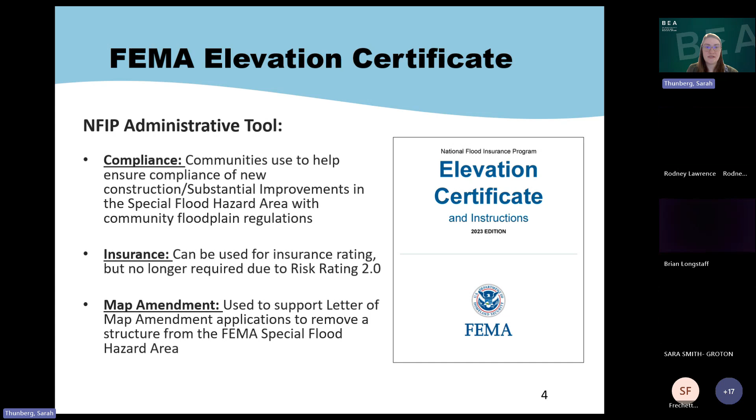The elevation certificate can also be used to support a letter of map amendment. It is essentially the final legal document that certifies how high the lowest floor of a structure is, and can then be used to get that structure removed from the special flood hazard area.

So the current version of the elevation certificate - whoops, this is incorrect, I meant to say it was released, not last month, it was released on July 7th of 2023. This update was to make sure that it aligns with the Risk Rating 2.0 new insurance rating methodology. It also has expanded sections to include more detail, and there's now a requirement for at least 2, but preferably 4, photographs accompanying the elevation certificate.

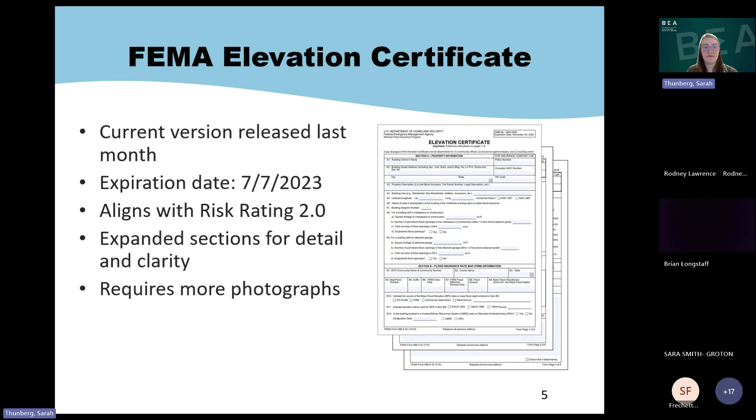If your community is part of the Community Rating System, or CRS program, that is a program that offers discounted insurance rates for community members in communities which have elected to have higher than the minimum NFIP standards. One of those activities that you can get credit for in the Community Rating System is requiring elevation certificates for all finished construction after either new construction or substantial improvements have been made within the special flood hazard area.

Communities are required to review all elevation certificates for legibility, completeness, errors, and to verify compliance with the community's floodplain regulations.

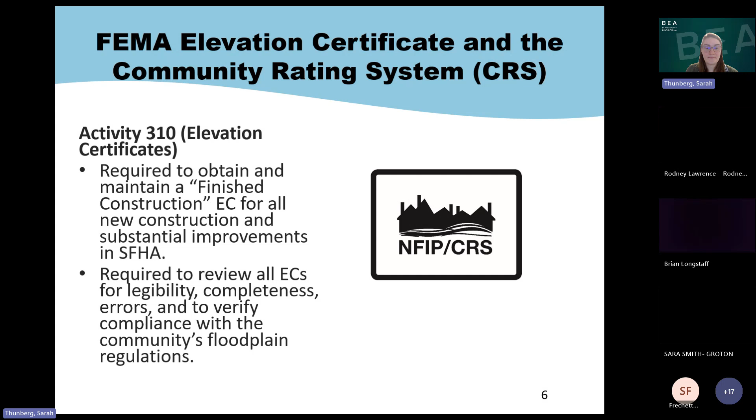As part of the annual recertification process with the Community Rating System, communities are required to submit all elevation certificates that have been approved within the last year. The CRS team will then review the elevation certificates and provide feedback in an elevation certificate evaluation report. This report will indicate any errors or compliance issues which are recommended to be addressed.

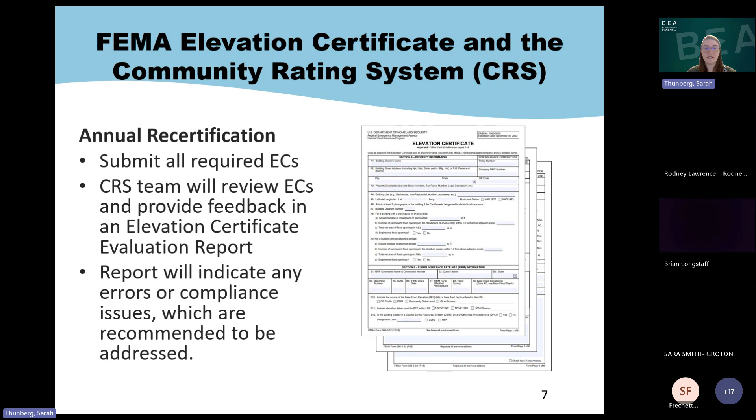So the cycle verification for the Community Rating System: you go through and submit all required elevation certificates, then the CRS team will review them and provide you with that elevation certificate report. In order to be fully verified with the CRS program, at least 90% of the community's elevation certificates must be correct, essentially having no problems. If not, the community must correct those elevation certificates in order to stay in the CRS program, and your community's CRS credit score depends on the elevation certificate correctness.

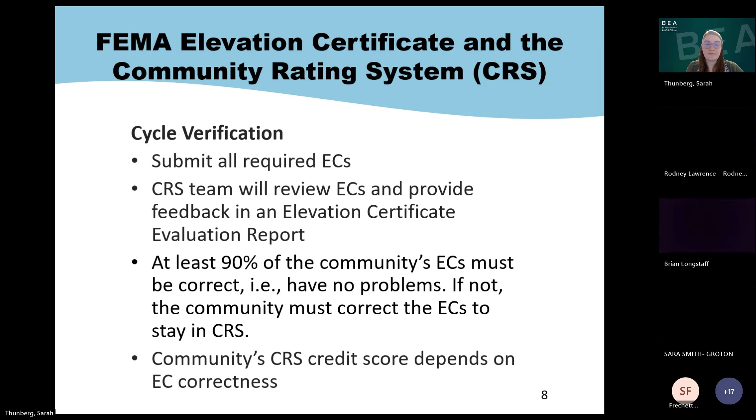So just a quick learning check here. Feel free to put your answers in the chat. True or false: does an elevation certificate certify whether or not a building is compliant with the community floodplain regulations and/or minimum NFIP standards? I'll give you guys a moment to put whether you think that's true or false in the chat.

I'm getting some answers in the chat here. Looks like true is the most common, or what everyone's agreeing on.

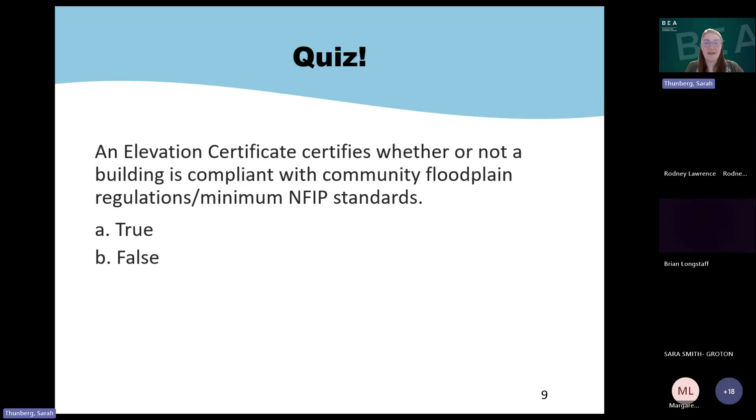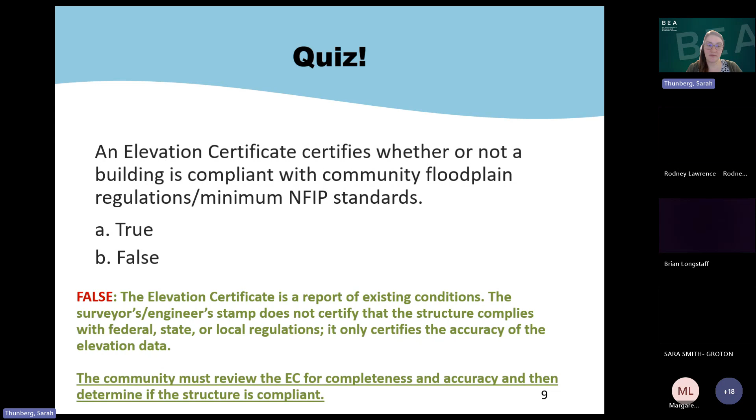That is actually false. The elevation certificate is a report of existing conditions. It's essentially the surveyor's or engineer's stamp, which does not certify that it complies with federal, state, or local regulations. It only certifies the accuracy of the elevation data. It's up to the community to review the elevation certificate for completion and accuracy, and then determine if that structure is compliant.

So when reviewing an elevation certificate for compliance with the community's floodplain regulation, even with the professional engineer's seal, it is possible to make mistakes.

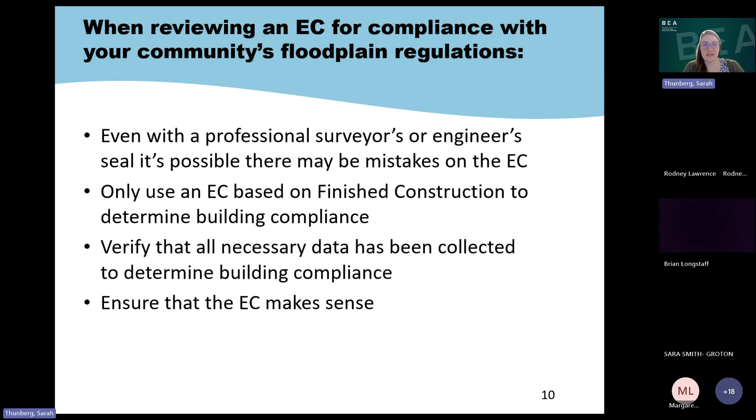You only use an elevation certificate based off of finished construction. You don't want to be verifying compliance on a pre-construction elevation certificate. Communities also want to verify that all necessary data has been collected to determine compliance, and ensure the elevation certificate makes sense - like not saying the lowest floor is actually higher than the roof, just using common sense that the right floors are marked at the right elevations.

So we're going to now go through the elevation certificate section by section. Here I have the sections listed out. There are also two new sections within the elevation certificate - section H and I, which have been added in the latest issuance. But we're going to start off with section A, property information.

This is the latest version of the elevation certificate. Section A is completed for property in all flood zones - that's both A and V, inland and coastal.

This is generally detailing your property information: building owner's name, street address, city, state, zip code, property description. Essentially you want to fill out your lot numbers, tax parcel numbers. Then item A6 is where you indicate the requirement for at least two, but when possible four, clear photographs, one for each side of the building. Additionally, this is where you're going to indicate which building diagram number you're going to use.

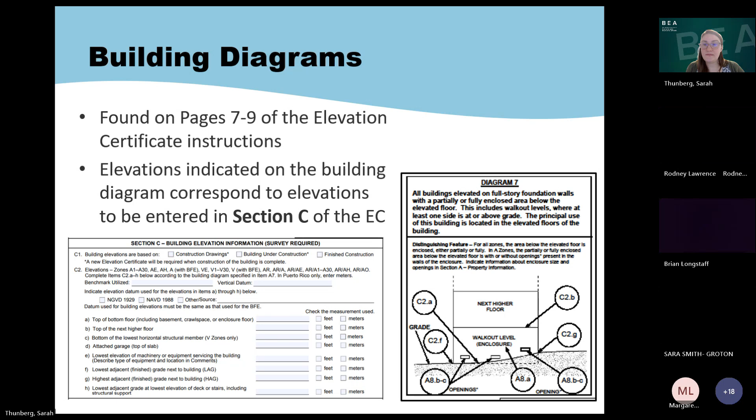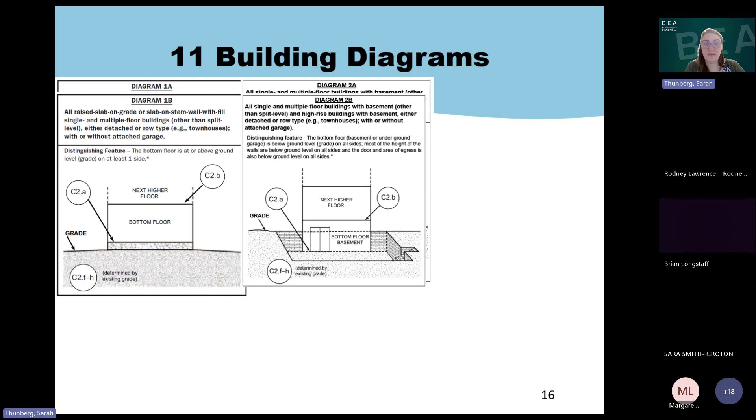I'm just going to go through some of the building diagrams possible to use on the elevation certificate. You have diagram 1A for all slab-on-grade single and multi-floor buildings, other than split level and high rise. Diagram 1B is similar, except there is a slab on stem wall with fill. Then diagram 2A is for all single and multi-floor buildings with basement, other than split level and high-rise buildings with basement, either detached or row type with or without an attached garage. Diagram 2B is again for all single and multi-floor buildings with a basement, other than split level and high-rise buildings with a basement, either detached or row type with or without attached garage.

I'm not going to read through every single one of these, but there is diagram 3, 4, 5, 6, 7, 8, and 9. All of these building diagrams are to include whether or not there is a basement, or if it's a slab on grade or enclosed area below. It's just important to verify that you are using the correct diagram on the elevation certificate.

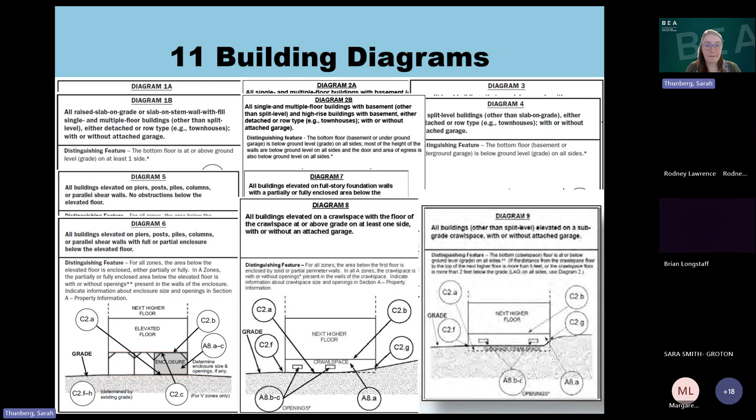So going back to section A, section A8 has been expanded for crawl spaces. This is to gather all of the data, because something you would want to know about a crawl space is whether or not there is one, and whether it's below grade on all four sides. That affects how the structure is considered for both floodplain permitting and flood insurance purposes.

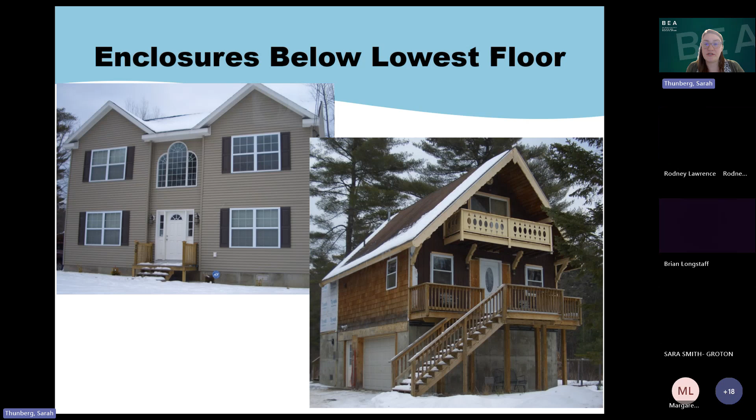Now, there's also elevations below or enclosures below the lowest floor, which can be used for attached garages. Those would be highlighted here in section A9 with the square footage, whether or not there is flood vents and the number of flood openings, and then the total square inch of those flood openings.

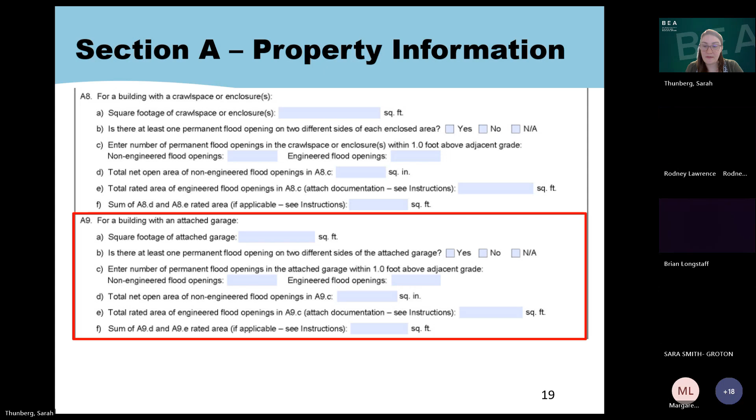So here are some examples of what an attached garage can look like. It can be the same elevation as the house, or it can be partially below grade, but not below grade on all sides. So it's important to make sure when you're filling out those building diagrams that you're capturing the correct type of enclosure.

Going on to section B, this is completed for all properties within all flood zones. This is where you're going to fill out the flood insurance rate map information with the community name, and this has been changed now to require a specific box for the community identification number. If you don't know your community identification number, it can generally be found on either the flood insurance rate map or the flood insurance study. Or if you don't have that information, you can always reach out to me and I can tell you what your community identification number is.

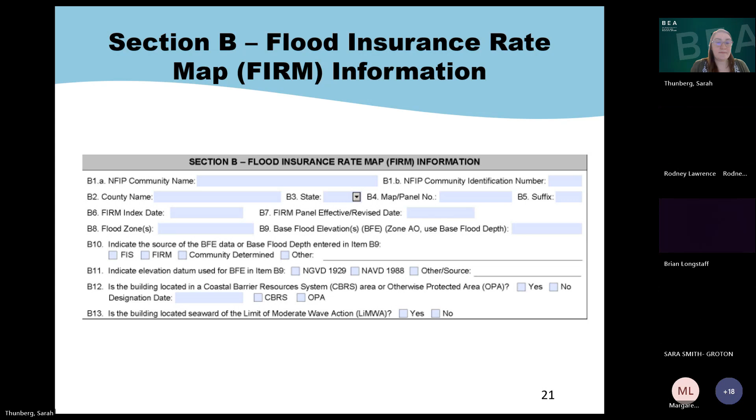So the new changes are that both B1.a and B1.b have been split up into two different boxes now, and item B10, the flood insurance study, has just been changed to only say flood insurance study rather than flood insurance study profile. But otherwise, everything else is still the same in section B.

So when you are filling out section B, here are some examples of where you can get some of the information required. You can get your flood insurance rate map index date, also your community identification number, map panel number, and the FIRM panel effective and/or revised date. Those should all be on the flood insurance study.

In section B, for most AE zones, the base flood elevation should be taken from the flood insurance study and not the map panel. That's because on the maps, the base flood elevation is rounded to the nearest whole foot, but if you are filling out an elevation certificate, you want to make sure that you are using the most accurate data, which would be on the flood insurance study. Those base flood elevations should be to the tenth of a foot, i.e. 140.4 feet versus 140 feet, which you would see on the map.

For AO zones, you just want to use the base flood elevation, the depth number that is on the flood insurance rate map. For V zones, it's pretty similar—you want to use the elevation that's on the map itself. And in zone A, not zone AE, zone A that has no base flood elevation available, you want to write in NA.

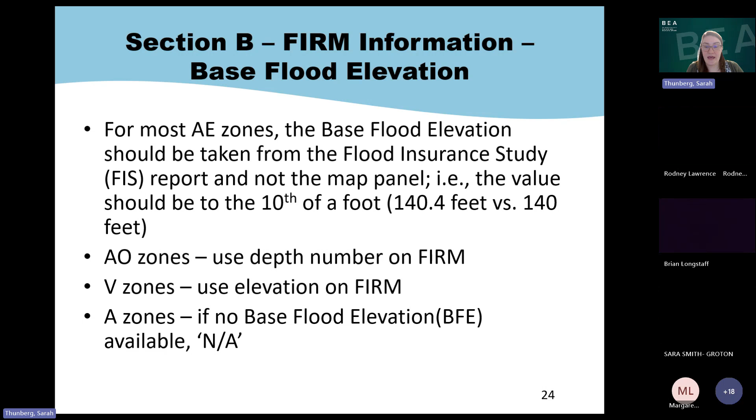Additionally, you want to make sure that you are using the same vertical datum that is on the flood insurance study. And in New Hampshire, we don't have any coastal barrier resource systems or otherwise protected areas, so at the moment item B12 would just be NA. One thing you do want to know with these elevation certificates is even if there is a section that doesn't apply, you still want to write something in every box, as that is something FEMA might flag for completion or completeness.

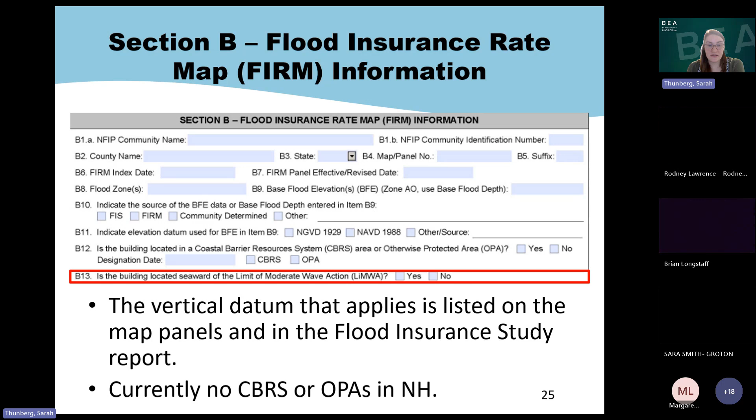Lastly, in section B, this really only applies for coastal zones, and you want to indicate whether or not the building is located seaward of the limit of moderate wave action.

All right, moving on to section C. This is where you're going to fill out the building elevation information. Doing an elevation certificate, it's generally best practice to use the finished construction when you are getting an elevation certificate. Sometimes you might do a pre-construction elevation certificate, but you always want to follow it up with a finished construction certificate.

And then you just want to go through these, marking the vertical datum and which benchmark was used. And then also indicate whether or not there is a conversion factor that you are using to convert one elevation datum to the other. And then it's pretty simple filling out the elevations. This is where you would just take it from the surveying data.

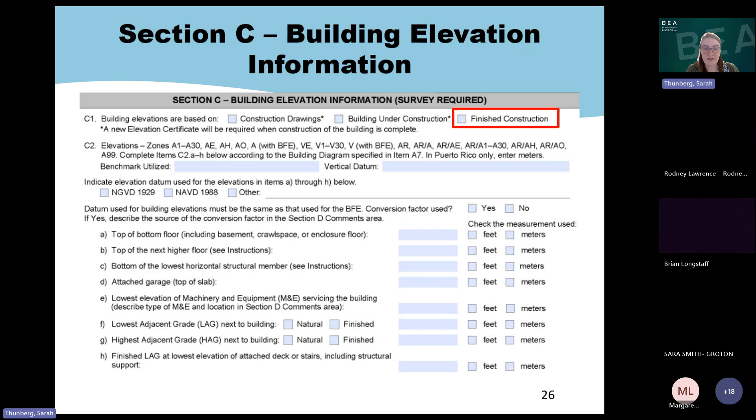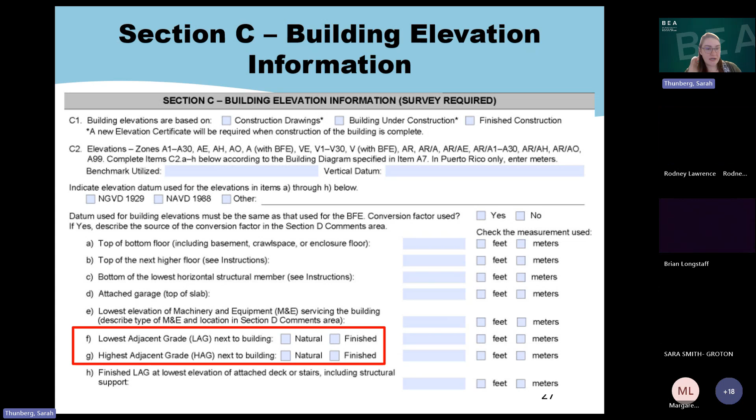All right, I got ahead of myself there. This is just where I was highlighting the lowest adjacent grade and that natural versus finished fill.

So section D is the next section to be completed if the property has a determined base flood elevation. So the elevation certificate for this kind of property must be completed by a surveyor, engineer, or architect who is registered in your state or in New Hampshire.

So you want to look at your paper copies to see that section D starts on the bottom front of the form and continues to the top back. It spans a couple pages. So you just want to make sure that if you are filling it out on a paper copy, you get the whole section filled out.

This is another location where errors can be made, if the person completing the form forgets to turn over the form and then add the signature and seal, because both the signature and seal are required for this section to be complete. And the document must be an original, otherwise FEMA is not going to accept it.

And in the comments section, this is where you're going to want to put what type and location of machinery with the lowest elevation, whether the interior grade was used to determine if openings are within 1 foot of the grade or of the highest adjacent grade. Also unique building characteristics, such as a bulkhead, and then anything else that needs explanation.

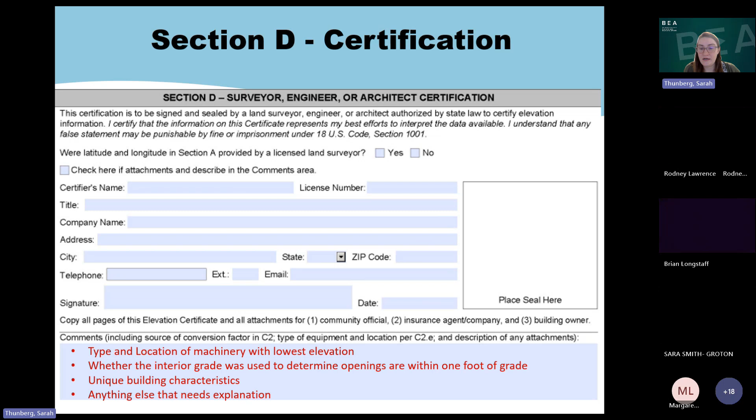This section did not have any updates in the 2023 amendment. So this is still exactly the same.

Now, section E did get a couple updates. Well, I guess let's first start off with this: it can be completed by the homeowner. And this is where you're going to be putting in whether or not there is a crawl space, also providing measurements for the top of the bottom floor and any areas within that have the flood openings or attached garages.

And so in items E2, E4, or E3 and E4 would be reviewed by the local floodplain administrator to check the structure's compliance. This section is also used both for flood insurance purposes as well as floodplain management.

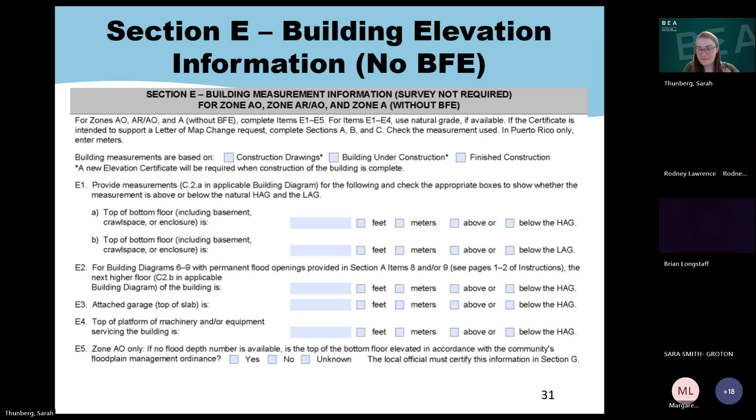All right. Okay, yeah, I believe that is, sorry, I had a couple notes that were supposed to go on a different section.

All right, so moving on to section F. This one is pretty similar to section D. It's the section where the person completing the form needs to sign it. This should be the property owner or the owner's representative. Again, this is where you're going to be putting in those unique building characteristics and any comments for anything that needs to be explained.

All right, so moving on to section G. This does not, it is not required, but it is recommended for community officials to complete. It is the easiest way to keep track of permitting in the community. This section is for floodplain management purposes. It's not for flood insurance.

So essentially, one example is that putting the first floor 2 feet above the base flood elevation cuts the cost of flood insurance in half. But again, this section is not necessarily used for the insurance purposes.

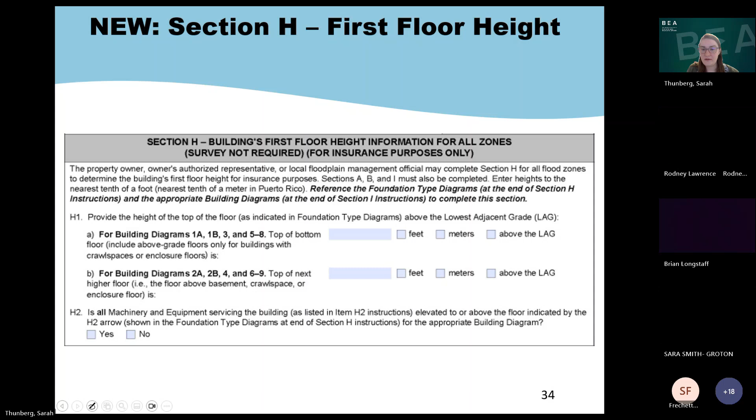All right, so I'm going to move on to section I. So I put the wrong notes in this one as well. This is essentially where the property owner is going to certify that all of the data is as correct as they are aware of, essentially certifying that this is the document they would like to submit as the legal or final legal elevation for your property. And again, this is where you're going to be adding any comments for unique characteristics of the building.

All right, so now I'm going to go over a compliance review example, essentially going through the elevation certificate as if I were a community official, just checking the form for compliance. So for this scenario, the community has permitted new construction of a one-story residential structure with a crawl space and attached garage in zone AE. The community requires elevation of the lowest floor to be at least 1 foot above the base flood elevation. The community conducted inspections during construction, construction was completed, and a finished construction elevation certificate was submitted for review and approval.

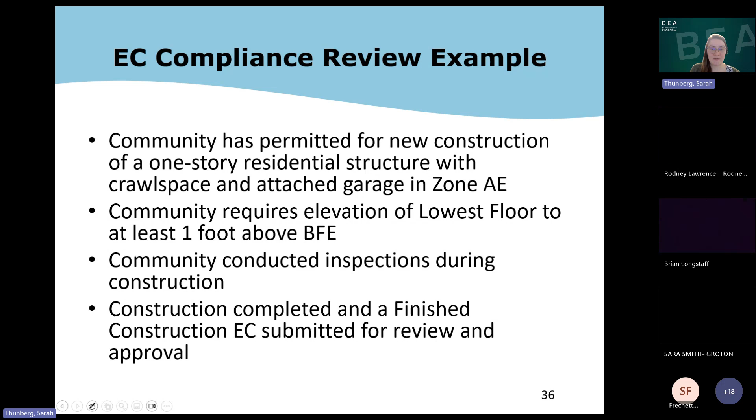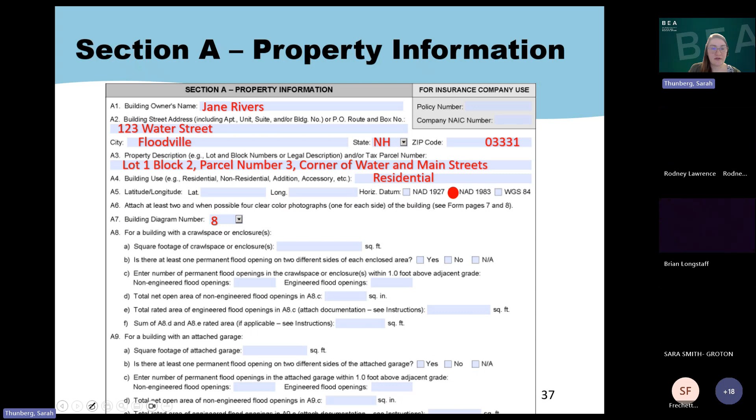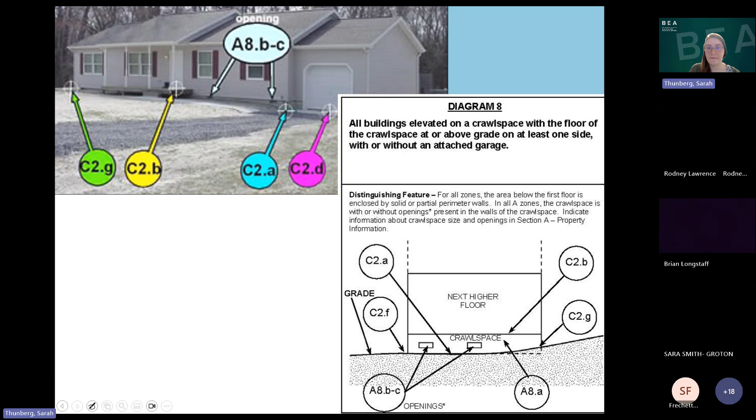So when filling out the property information, you just want to verify that the square footage of the crawl space is here, also the number of flood openings and the total net area of the flood openings. And then for the attached garage, you want to verify the square footage of the garage, whether or not there are flood openings, and also the net area of the flood openings. In this case, there are none, and you would indicate here that there are no flood openings in the garage.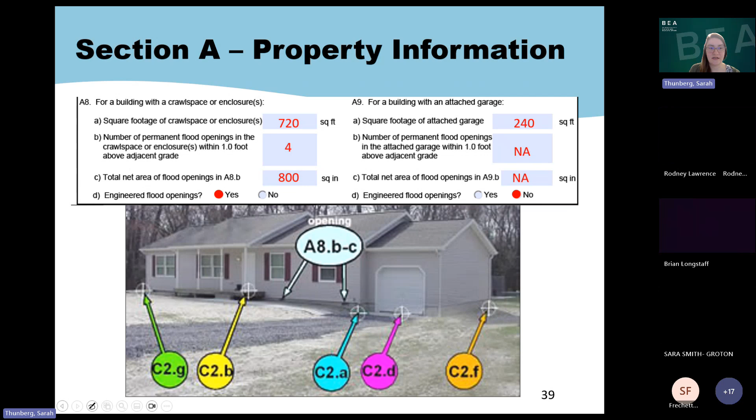This is just the same form, the same section A. This was the previous issuance of the elevation certificate, which has now been updated, but it still has the same information. It's just now kind of stacked on top of each other.

All right, so you also want to ensure that for new construction or substantial improvements, the lowest floor must be elevated to the base flood elevation or higher if the community enforces a higher standard. And enclosures allowed below the base flood elevation must be used solely for parking, building access, or storage. Also, they cannot be below grade on all sides and can contain the required number and net area of flood openings. When all 3 of these enclosure criteria are met, that's what's going to be considered the lowest floor, this first living floor space. This enclosure would then just be an enclosure used for storage and parking, and be fully vented.

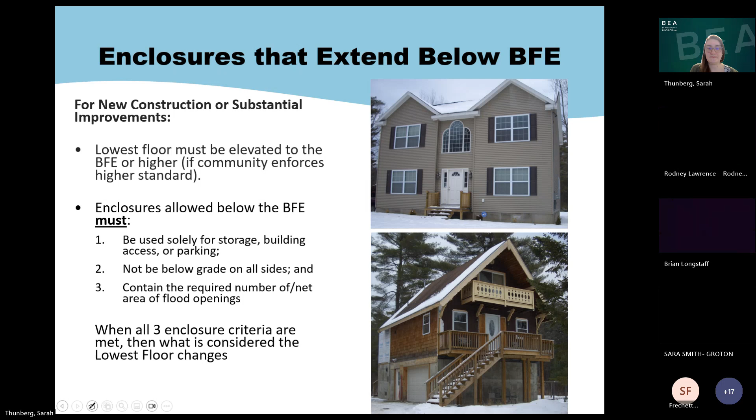So which enclosures require flood openings? That would be solid perimeter foundation walls, so crawl spaces with full height under-floor spaces or other underfloor spaces on which a manufactured home is installed.

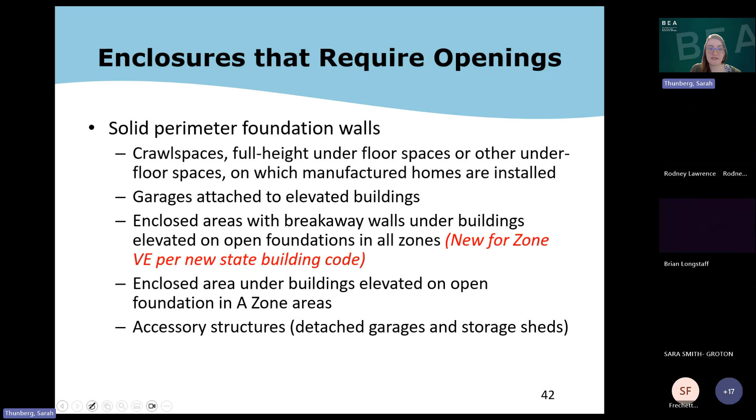This also includes garages attached to elevated buildings, enclosed areas with breakaway walls, under buildings elevated on open foundations in all zones, and also enclosed areas under buildings elevated on open foundations in A-zone areas. Also for accessory structures such as detached garages and storage sheds.

An opening is considered a permanent opening that allows for free passage of water automatically in both directions without human intervention. A window, a door, or a garage door is not considered an opening, and openings may be installed in doors.

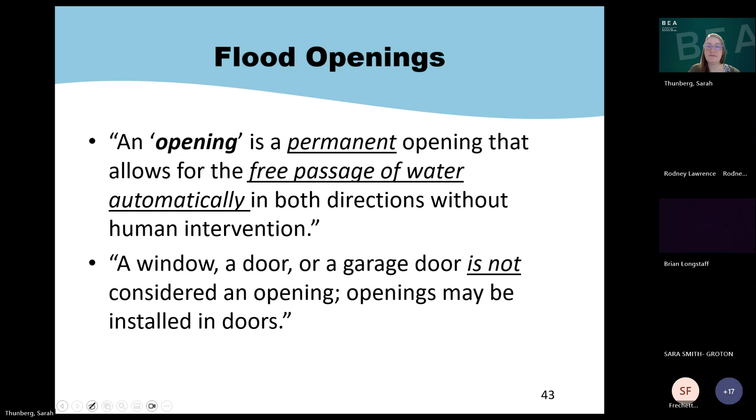Continuing, the openings shall provide a total net area of not less than 1 square inch for every square foot of area enclosed. That excludes any bars, louvers, or other covers of the opening.

Openings shall be on at least 2 sides of the enclosed area. And if a building has more than one enclosed area, each area must have openings to allow floodwater to directly enter.

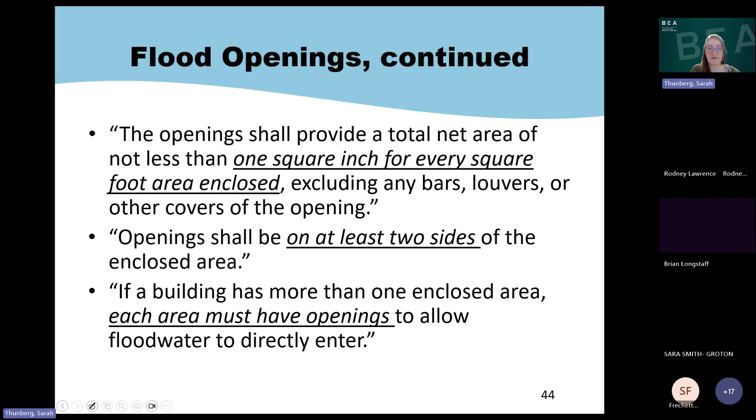The bottom of a flood opening cannot be more than 1 foot above grade, interior or exterior, whichever is higher. So here I have a diagram. This is our flood opening here, this is the exterior grade, this is the foundation with the interior grade here, and this cannot be more than 1 foot.

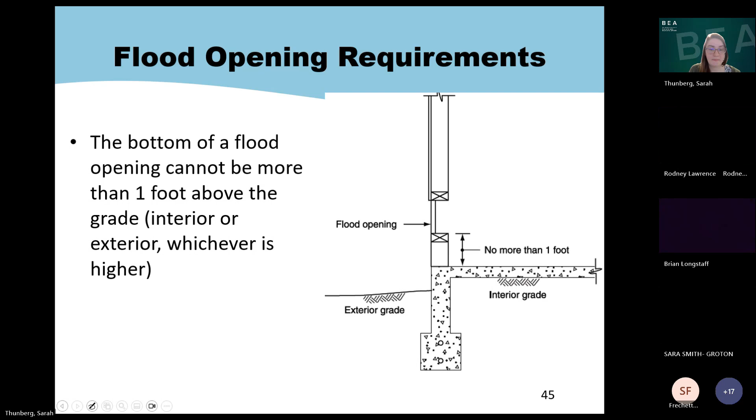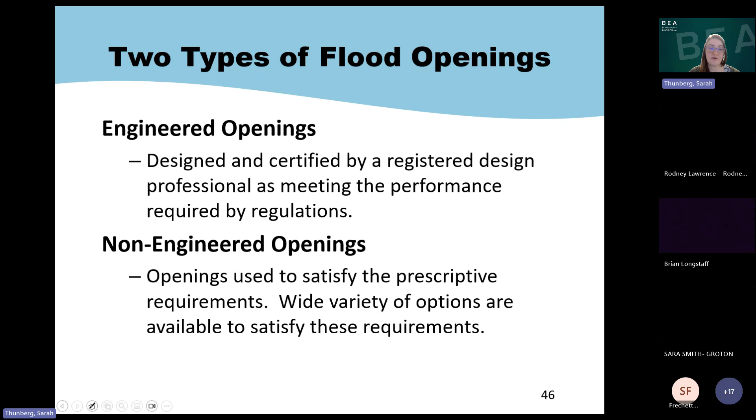So there are 2 types of flood openings: engineered and non-engineered openings. The engineered openings are designed and certified by a registered design professional as meeting the performance required by FEMA regulations. The non-engineered openings are used to satisfy prescriptive requirements. There's a wide variety of options available to satisfy these requirements.

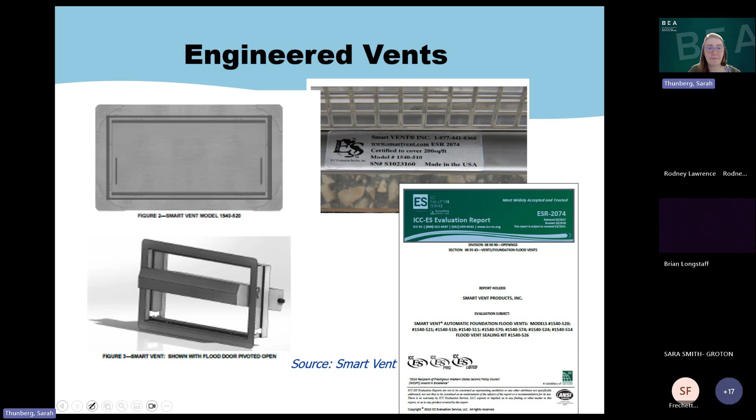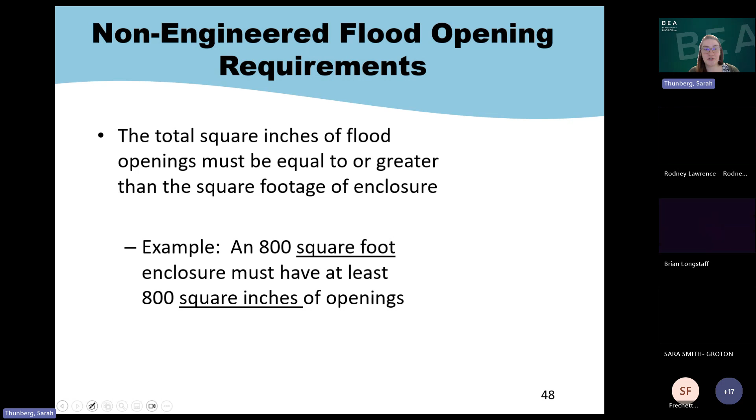Now, non-engineered flood openings have to have the total square inches of flood openings equal to or greater than the square footage of the enclosure. So an 800 square foot enclosure must have at least 800 square inches of openings. This is an example of a non-engineered flood opening, literally just an open vent that will not allow rainwater in, but flood waters are allowed to freely move into that area.

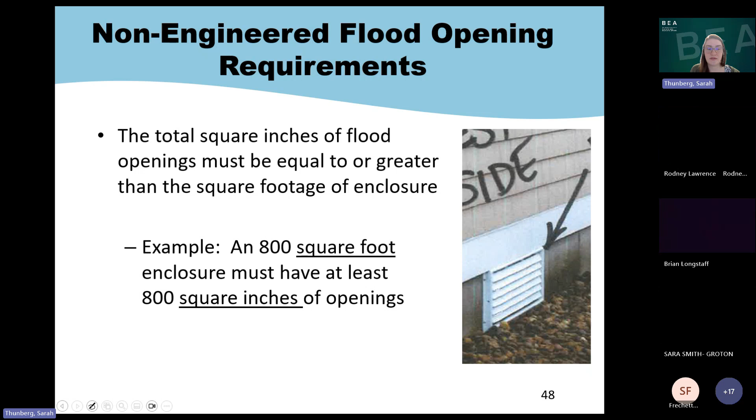So in reviewing the crawl spaces and attached garages for the flood openings, this is the checklist that you want to go through.

Is the net area of flood openings, line A8c here, equal to or greater than the square footage of the crawl space enclosure? If yes, it's good; if not, you need to look further into that. So right here we have 4 flood openings and square footage is 720. We have 800 square inches of flood openings, so we are good with the crawl space.

Does the number of openings within 1 foot of grade appear correct? Yes, it does. If engineered flood openings is checked, is there accompanying documentation about the flood openings? That is something that would be submitted with the elevation certificate.

Skipping this one because we did have at least one flood opening checked here. Then, is there an attached garage? And if so, is the square footage included? Yes it is, that's right here. And then, are there openings, and if so, do they meet the same requirement noted for the above enclosures? No, there are not any flood openings in this garage. So we are good.

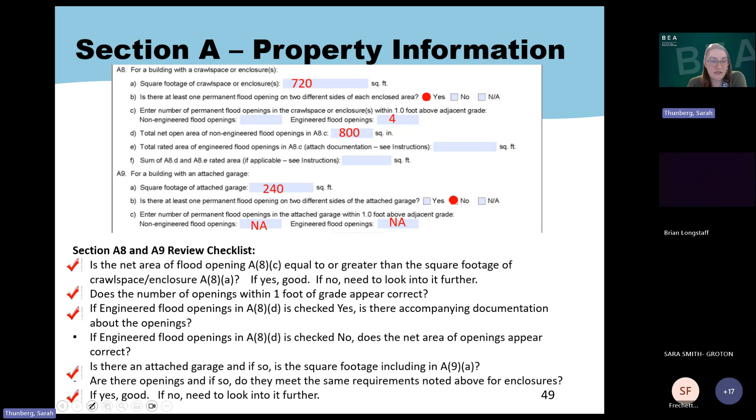Okay, going on to section B. This is where we want to confirm that the community name and community identification number are all correct. You want to verify that the map panel number is correct, and also check the index date on the flood insurance rate map panel, and also whether or not there was a revision.

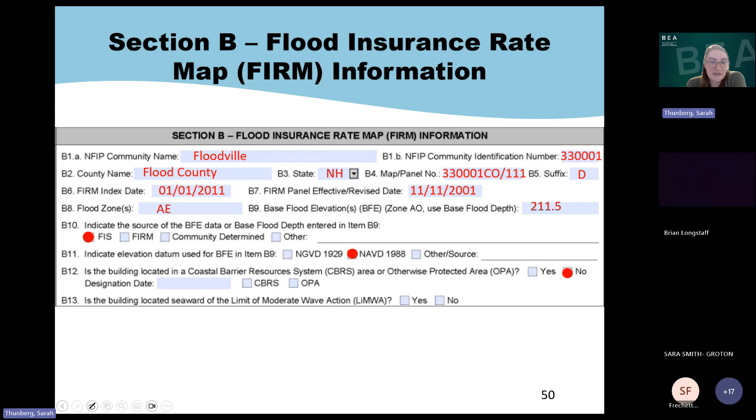You also want to verify the flood zone and the base flood elevation. Again, make sure that this base flood elevation is taken from the flood insurance study, and it is to the nearest tenth of a foot. Just indicate the source of your data and which vertical datum you are using. And again, there are no coastal barrier resource systems or otherwise protected areas in New Hampshire, so this does not apply; you would just fill out no.

All right, going over Section C. When you are ideally reviewing this during finished construction for issuing a certificate of occupancy, you want to make sure that you have the vertical datum listed, as well as which benchmark has been used.

And then which vertical datum you're going to be using for all of the elevations for the different floor heights. So you want to go in and verify that all of these elevations make sense, such as the next highest floor being indeed higher than the bottom floor, and that this follows logic sense.

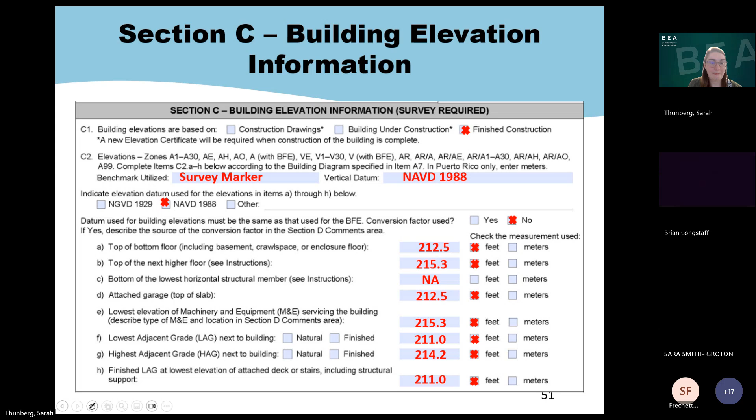All right, so this right here is just indicating, comparing, or showing you how each of these, the top of the bottom floor and the next highest floor, would be filled out corresponding to the different markers in the building diagram.

This is also where you want to verify that the top of the bottom floor is higher than the base flood elevation. And if not, that would be something you want to look more into to verify whether or not the basement is going to be considered building compliant or not.

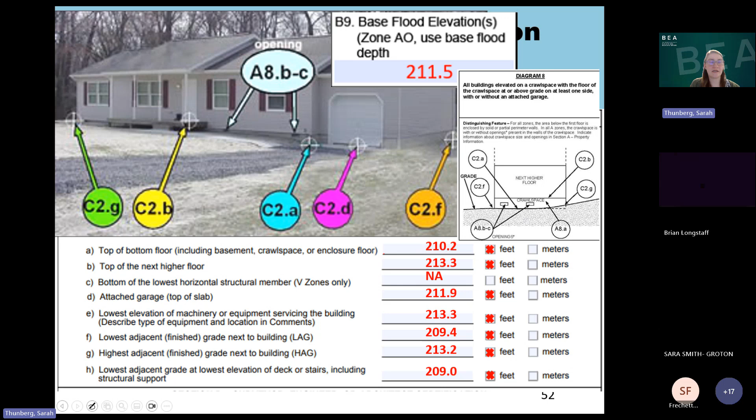All right, so just the checklist for Section C. Is the bottom floor at or above base flood elevation? And if your community requires more freeboard than the state building code, which is 1 foot, you want to verify that the bottom floor is following your community's floodplain regulations.

You also want to check if there is an enclosure below the base flood elevation, and if so, is it solely used for parking, storage, or building access? And is the first floor of the enclosure above grade on at least one side?

You also want to check if it has the required number of net area of flood openings, and then you can determine whether or not that is compliant with your community's regulations, or if the enclosure is compliant. Additionally, you want to check if there's an attached garage and whether or not that is compliant with your community's floodplain regulations.

And if the enclosure is determined to be compliant, then that is not going to be considered the lowest floor. The lowest floor is then going to change to the next higher floor.

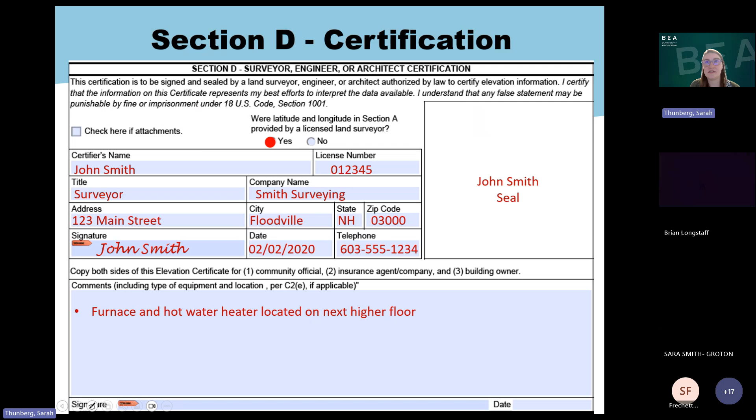I apologize, this got a little out of order. This was the checklist for Section C, which we already went through.

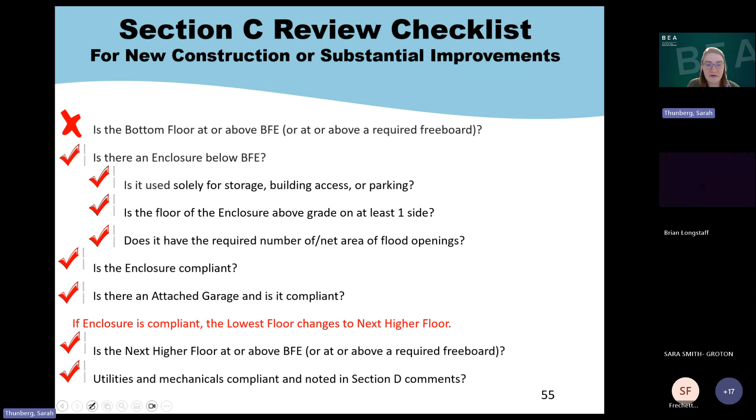Now, this is something that the engineer, surveyor, or architect should have a good grasp of, but it is occasionally missed or not represented correctly. There are many FEMA resource documents that I'll be going over, with some resources that can help with determining which building diagrams should be used.

Also, some more common errors are that machinery and/or equipment is not entered, such as a tractor, snow machine, or any utilities that are in the basement and/or garage.

We also often get incorrect community numbers. If that's something you are unsure of, please reach out to me and I can happily give you your community identification number. Also, that goes for the map panel numbers. Both of those are fairly easily looked up online through either the Map Service Center or New Hampshire's Flood Hazard Viewer.

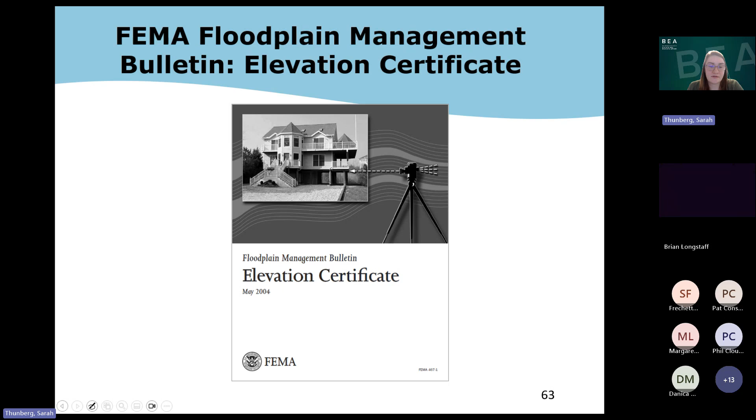Additionally, FEMA has many different bulletins. This is one that they produced in 2004 on elevation certificates, but they also have plenty of other building recommendation bulletins that FEMA releases regularly. I encourage you to go to the FEMA publication library and browse through there to see whether or not there are any helpful resource documents for you.